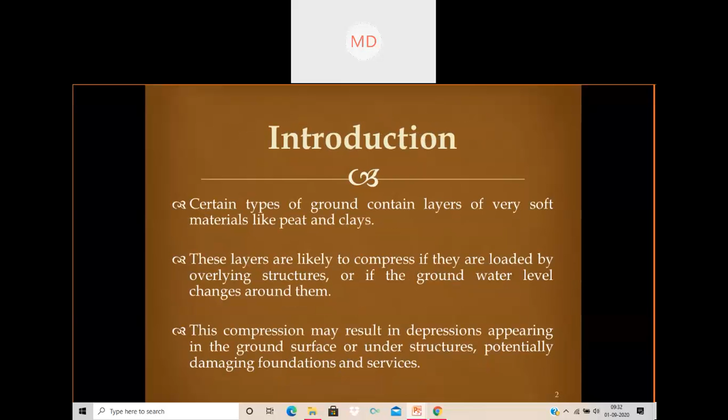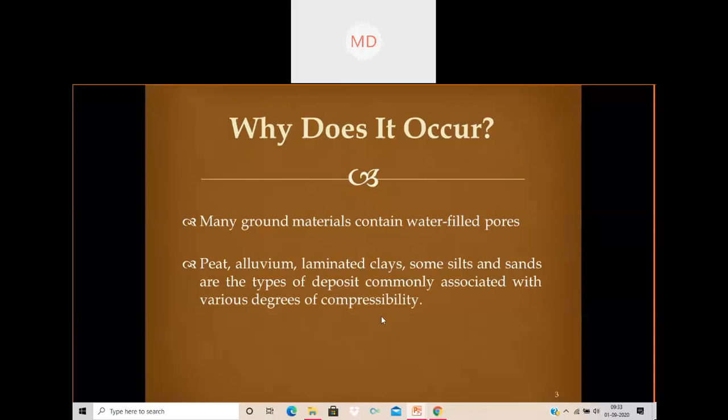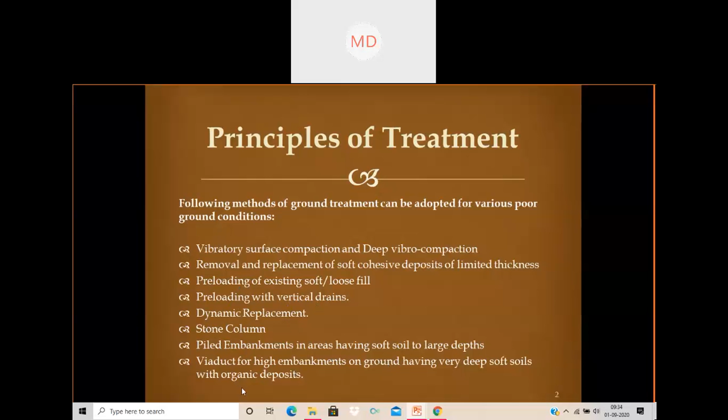Then dynamic replacement. Stone column, piled embankments in areas having soft soil to large depth. Viaducts for high embankments on ground having very deep soft soil with organic deposit. So let us see one by one. First is vibratory surface and deep vibro compaction. So here the surface vibratory compaction is used for densification of loose cohesionless soil using vibratory roller.

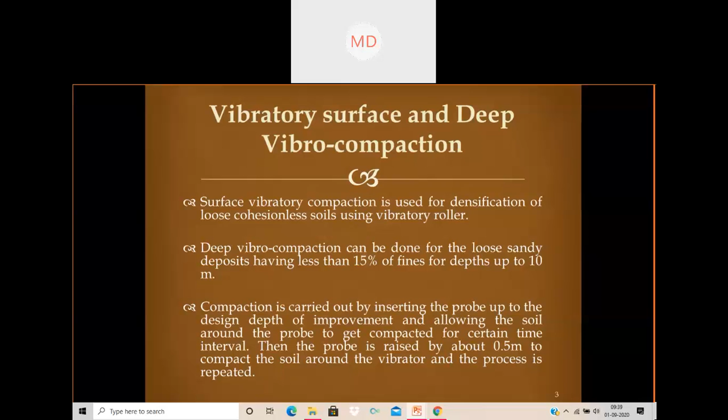But this process cannot be applied in every situation. Only for localized areas and where the depth of the loose soil is less. If the depth of loose soil is less, only then can we apply this process. Otherwise it will not be much economic, and it will be hectic. Also the area of the site should not be too large, and the depth of loose deposit should also be small. Only then can we apply this process of removal and replacement.

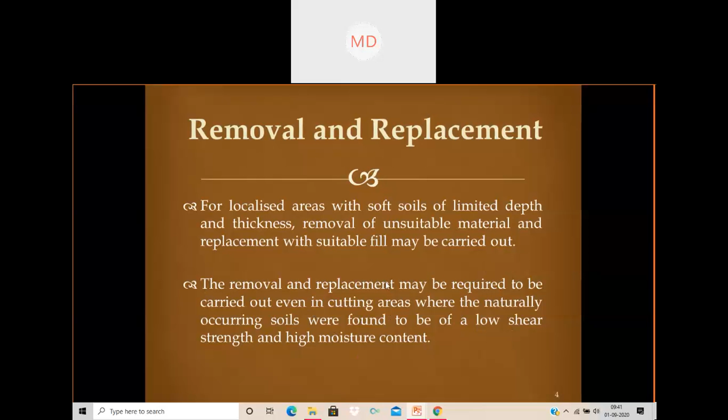Removal and replacement may be required even in cutting areas where the naturally occurring soil is found to have low shear strength and high moisture content. This is the kind of soil we will replace. If there is high moisture content, it will be compressible, so we need to remove this type of soil. So this is one of the processes, removal and replacement.

Next is preloading, already discussed. Can anybody say what is preloading? Just an idea, I don't want a perfect definition, just what is preloading?

No response. What happened? Preloading, what is preloading, anyone? You can either unmute yourself or mention it in the chat box.

Giving additional vertical stress. Anybody else? Before load. Before load means, Tashika, can you elaborate? Load is applied to soil for consolidation. Okay. Providing stress so that settlement is reached, pre consolidation.

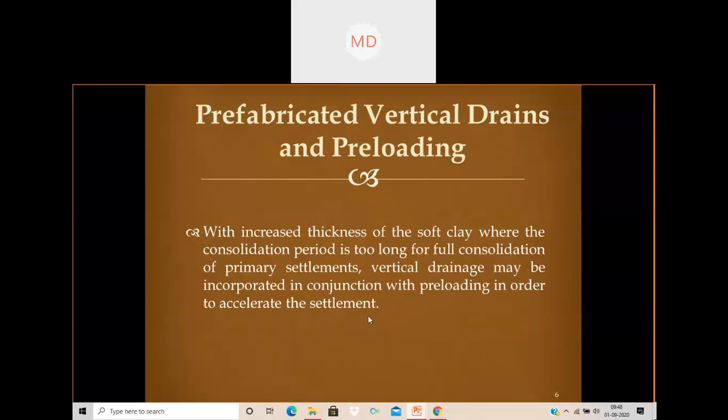Next is dynamic replacement. I've told you about dynamic replacement before, I guess. Just in simple terms, can you say what is dynamic replacement, or dynamic compaction, as we can also call it?

Replacement of loose or low compacted soil. It is not replacement. It involves giving external stress by using heavy mass. Yes, exactly.

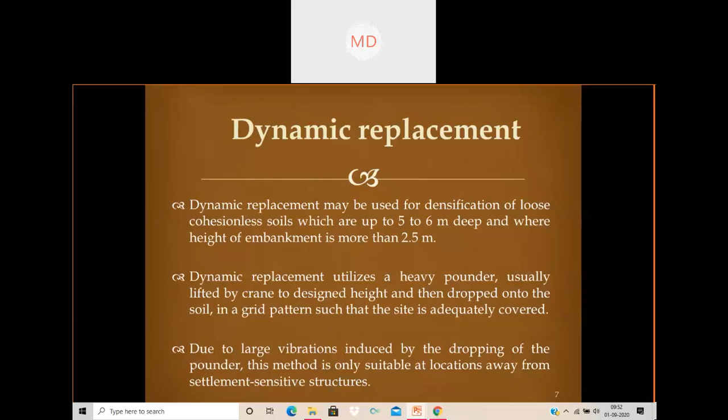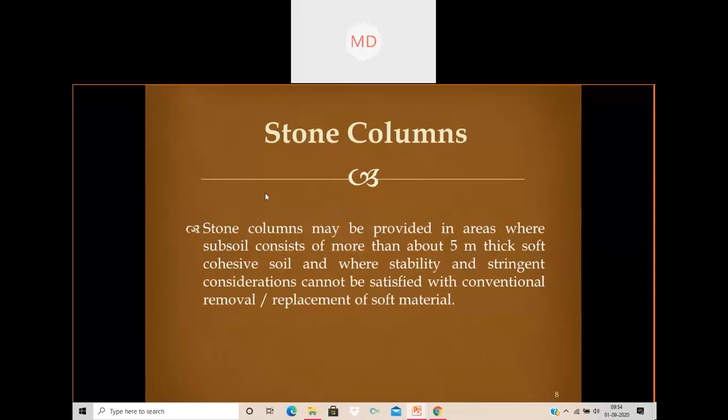Then we come to piled embankments and viaducts. In soft soil areas, embankment height exceeding the pre-consolidation pressure will give rise to excessive settlement. This can be avoided by means of structural solutions such as viaduct or piled embankment.

So what is a viaduct? Can anybody say what is a viaduct? There was no response for viaduct.